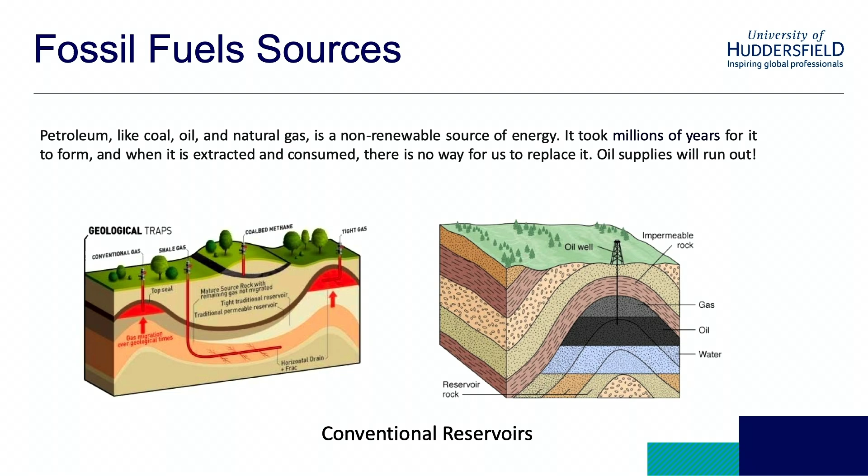These petroleums are trapped under the ground by geological formations, and there are different types of reservoirs that hold petroleum and fossil fuel. The conventional reservoirs are the ones that are easier to extract fluid from. Imagine that there is a pool of oil underground, you drill the production well, and the oil comes out. Humans are using these conventional reservoirs, and they produce fossil fuel, gas, and oil from them.

But as I said, we will run out of fossil fuels soon. So what did we do? Did we appreciate Mother Earth for what was given to us and just leave the Earth alone? Well, of course not. There's another type of reservoir that captures fossil fuels, which is called unconventional reservoirs. Because of the type of the formation and the fluids that have been stored there, it's not easy to extract fossil fuels from these reservoirs.

But thanks to technology, enhanced oil recovery was discovered in the last few decades. These methods are not cheap, they are expensive. But we are going to run out of conventional fossil fuel. So humans started using these technologies to produce gas and oil every day. But are they harmless? I'll give you two examples.

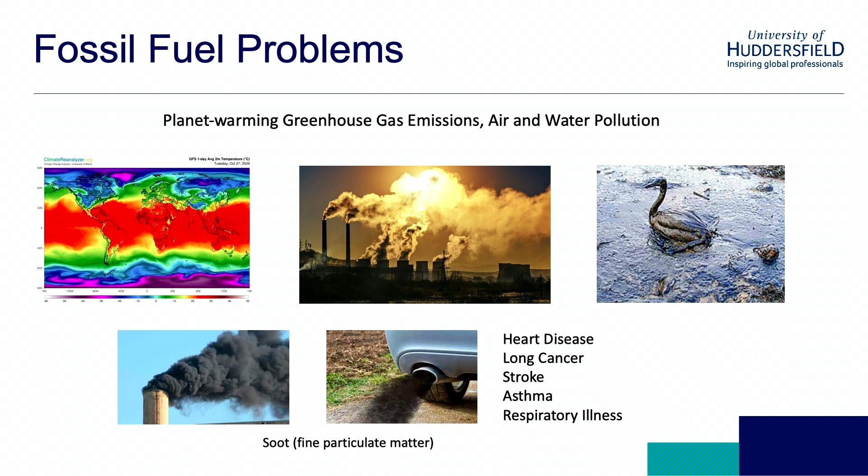We have heard about global warming. It's a big challenge everyone is dealing with nowadays. Burning fossil fuel causes air pollution. Their leakages cause water pollution. And also, the little particles in these emissions can cause heart attacks, strokes, asthma, etc. Scary, right? Buckle up, I'm not done yet.

There are other challenges that humans are going to deal with pretty soon. We talked about CO2 and emissions that need to be taken care of as soon as possible. Also, we are producing more waste every day than the day before. If we don't think about it, pretty soon the Earth will be covered with this waste. And one more time, we are going to run out of fossil fuel pretty soon, so we are going to have an energy problem. Is there any way to take care of all these problems at one time?

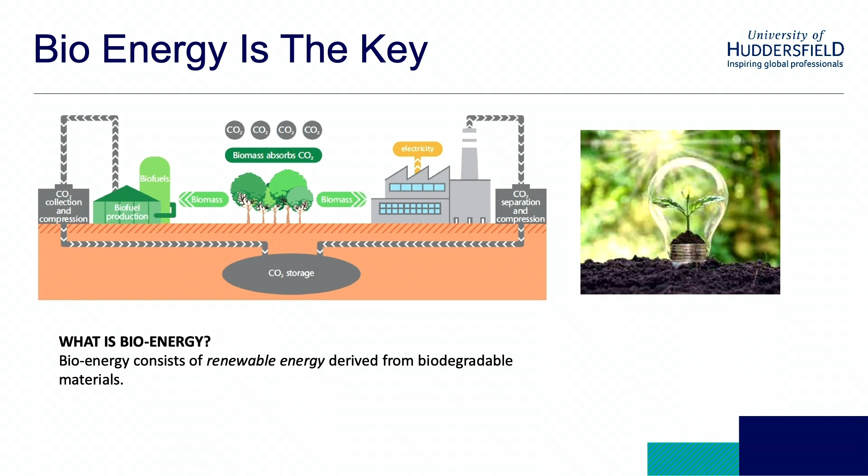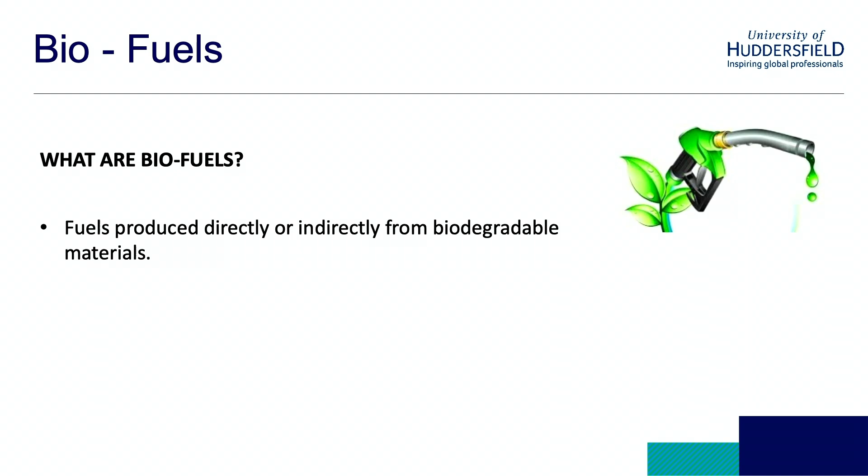So far, it was a journey through a dark tunnel. I want to show you the light at the end of this tunnel. We think that bioenergy is the key. Bioenergy is a renewable energy source that comes from biodegradable material. Bioenergy is produced from biofuels. So what are these biofuels? Biofuels are produced directly or indirectly from biodegradable material. It means material that, if it breaks down into small pieces, those small pieces are harmless.

Biofuel, similar to fossil fuel, is made of hydrocarbon. So what's the point? If that's hydrocarbon and this is hydrocarbon, why am I using it? Why are we thinking about it? Unlike fossil fuel, biofuel is made of waste. Fossil fuel takes millions of years to be formed. But biofuels are made from general waste, agricultural waste, food waste, etc. It's very promising.

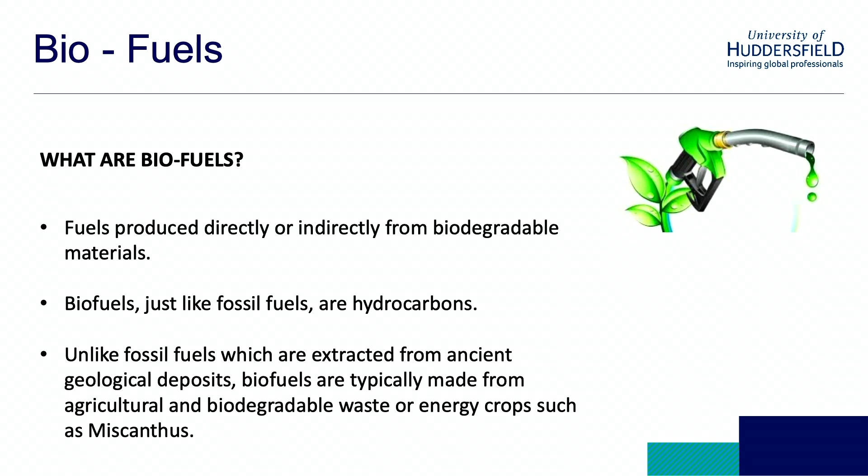Now, how can we produce biofuel? At the University of Huddersfield, in our research group, we are focusing on different technologies, processes, and methods that produce biofuel. One of these technologies is called pyrolysis. Pyrolysis is a thermal degradation process that breaks down the material in the absence of oxygen into small pieces that can produce biogas, bio-oil, or biochar.

If I want to explain how pyrolysis works, I'll bring in a fun example. If you have watched the movie Back to the Future, when the doctor was stuck, he asked Marty to bring as much garbage as he could to put it in the engine chamber. That's the pyrolysis system.

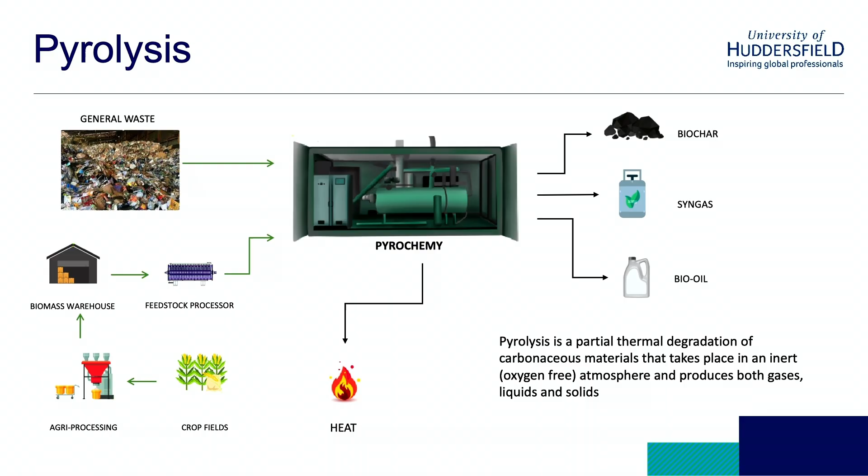So pyrolysis receives general waste, agricultural waste, any kind of waste as a feedstock. We put it in a chamber, it degrades it, and produces heat that can be directly used, bio-oil and biogas, which are our biofuels, and it also comes with a bonus. Biochar is a byproduct of the pyrolysis process.

Biochar itself is very valuable. It can be used for carbon sequestration, for soil improvement, or as a filter for environmental remediation. So not only are we producing biofuels with pyrolysis, the byproducts are also very valuable.

Another technique that can help produce biofuels is gasification. Gasification is very similar to the pyrolysis process, except that a little bit of oxygen is added in a controlled way, which means a little bit of burning is involved. Gasification, again, receives general waste or agricultural waste as a feedstock, as an input, and then biogas, bio-oil, and biochar are produced at the end.

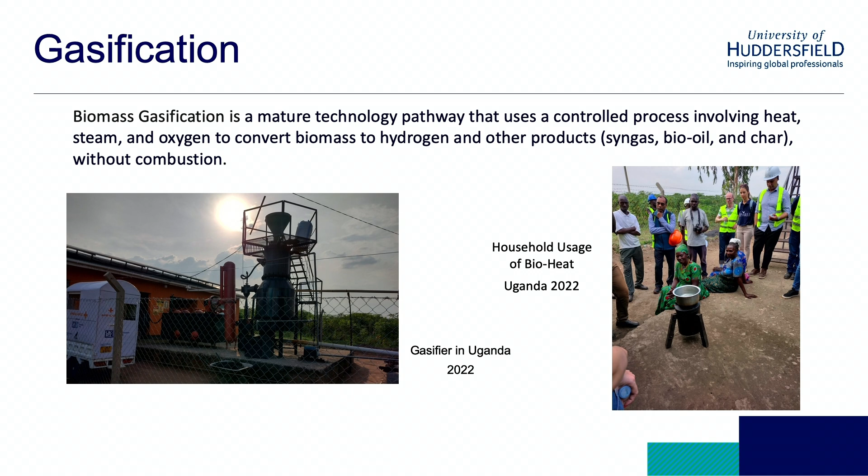These are images of a project in Uganda, a village that does not have natural gas or electricity, but there are tons of agricultural waste available there. A gasifier chamber has been installed there, and the agricultural waste is used to produce gas, and that gas is used in the village.

Another method to make biogas is called anaerobic digestion. Anaerobic digestion is the process in which bacteria break down organic materials, like food waste. This is a really good method to take care of our food waste. I mentioned pyrolysis and gasifiers before. These are good methods for agricultural waste or general waste, but specifically for food waste, anaerobic digestion has shown a really promising process.

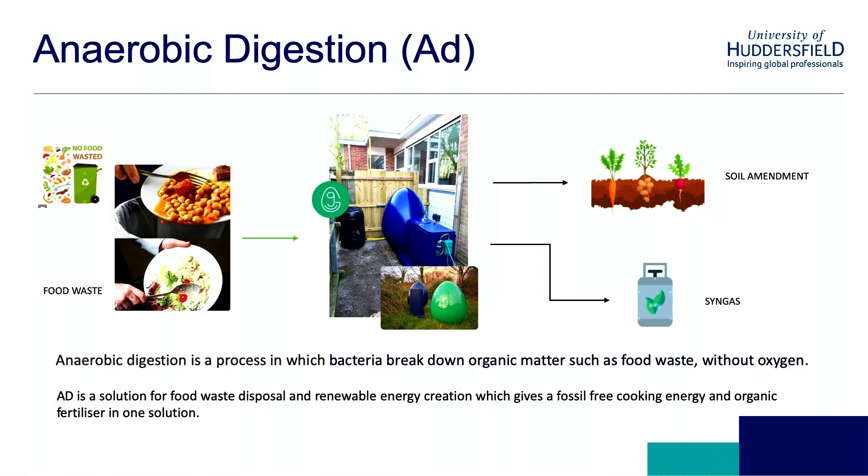Receiving the food waste from the kitchen at the university, our anaerobic digestion produces syngas or biogas, and similar to the pyrolysis process, it comes with another bonus, a very useful byproduct called digestate, or fertilizer. So if you walk around this university and see flowers perfectly bloomed and green plants, remember that's on us. We feed the plants with the digestate that we produce on site.

Okay. So I mentioned a few techniques, technologies, and processes that produce biofuels. What do we do with this now? Yes, these fuels can be directly used for warming up boilers or heat, but they can also be used to generate electricity.

Another project we are working on is using microturbine generators to produce electricity from the biogas and biofuels we are producing. The biofuel combusts and creates high-pressure gas. Then that gas passes through the turbine and makes mechanical energy. That mechanical energy, through the generator, creates electricity.

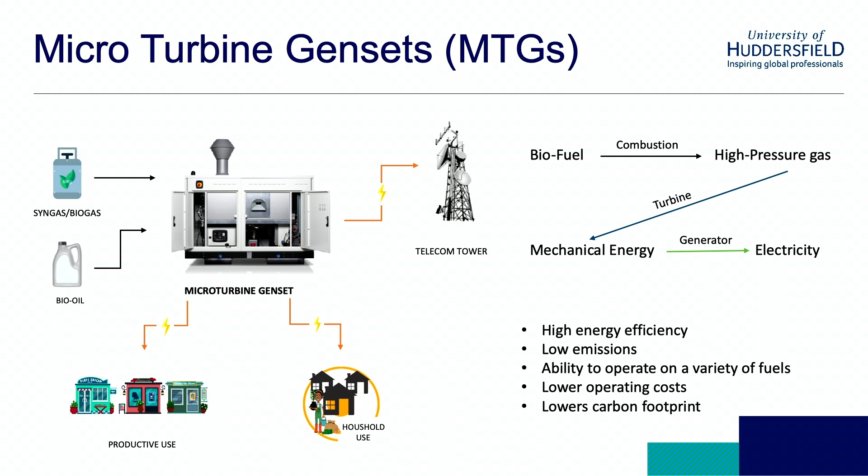There are gas engines that can produce electricity as well, but there are benefits to using micro gas turbines. First of all, they have high energy efficiency, low emissions, and lower operation costs, but mainly, one of the benefits gas turbines have is that they can run on various fuels.

So all these biofuels that I mentioned, which we can produce with different technologies and processes, come from waste, right? They're not one type of waste. We are talking about agricultural waste, food waste, general waste. So can you imagine that these products, the gas, for example, produced through these technologies, all have different profiles. They are similar, but with different proportions.

So if I want to generate electricity by burning that gas, it needs to be purified, simplified a little bit. But with these gas turbines, they can receive different types of fuels and work on varying percentages of methane. The good thing is that you don't have to purify our biofuel, it can directly be used in the gas turbine to generate electricity.

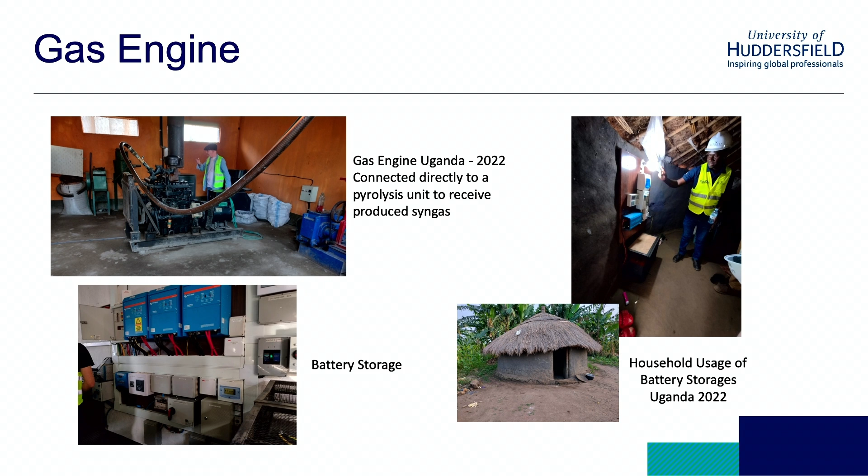The same village I showed you where the gasifier was installed, there's another picture where the gas engine was connected to that pyrolysis unit. The reason was that village, specifically in Uganda, had agricultural waste that could be used in the gasifier to produce biogas. That biogas is then used in the gas engine, producing electricity. That electricity is stored in battery tanks, and those tanks are delivered to houses in the village every day, with the empty ones collected the same day.

These technologies and processes are already well-known. In our research group, we are focusing on all these processes in different, separate individual projects. We study the input biomass and the output, to help increase the efficiency of these processes. We're also working on improving the quality of the produced biofuels.

However, we have a bigger vision, we did not stop there. Within collaboration of different schools at the University of Huddersfield, the Energy Integration Lab was developed to integrate different processes and technologies that produce biofuel and bioenergy, and to create an on-site net zero village.

The waste is collected from universities—food waste from kitchens, general waste—and we use it in our pyrolysis units, gasifier units, and anaerobic digestion unit. The produced fuels are either directly used as heat to warm buildings or to generate electricity, used at the university or even sold back to the grid. The byproducts also provide financial benefits that help maintain the site.

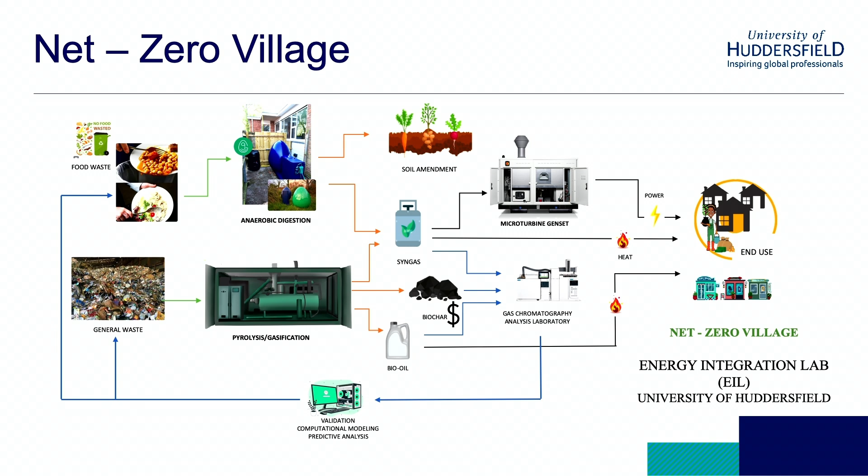This site is running very soon, hopefully, and we are creating our net zero village on site at the university. Our team is from different schools in the university: the School of Computing and Engineering, Applied Sciences, and the Business School. Our goal is that after successfully running our pilot project...

We are going to ship the whole system to developing countries where it's not easy to install or build up the system. So after testing it, we are shipping it to developing countries, to the villages that we are working on—they are our partners.

For example, one project has already started. It's been two months that in Kenya, the feedstock and waste has been decided, which one we are using, and they are paving the ground and waiting for the shipping containers to arrive to create a net zero community. So cheers to the greener future.